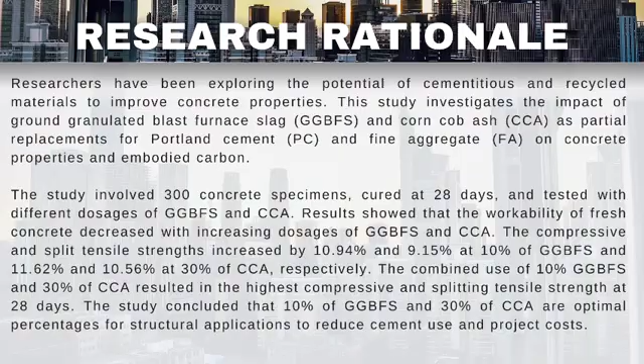Research significance: consistently developed towards sustainable growth in the construction industry. Second, reducing societal waste through the utilization of corn cobs. Lastly, to investigate the impact of GGBFS and CCA as partial replacement materials for PC and FA respectively on the properties of fresh and hardened concrete, as well as on the embodied carbon of concrete.

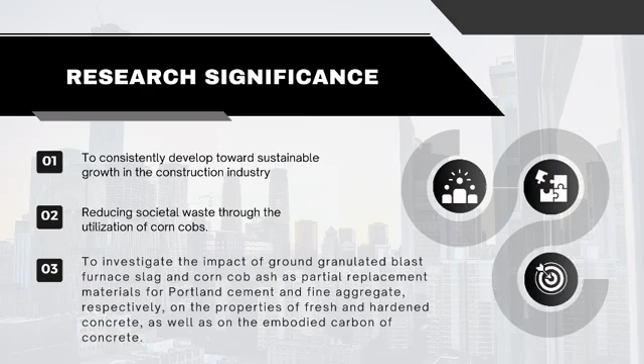Materials and methods: GGBFS, corn cob ash, coarse aggregate, and fine aggregates. The ground granulated blast furnace slag was obtained from a steel mill with prior approval. After collecting it, GGBFS was dried under atmospheric conditions for 24 hours. The dried GGBFS was passed through the number 300 sieve to eliminate unwanted particles, and then used as a PC replacement ingredient in the mixture.

The corn cob was collected and then burned under an uncontrolled temperature arrangement for 5 hours to convert it into corn cob ash. After obtaining the ash, it was sieved through the number 4 sieve to remove large particles, and then the sieved ash was utilized as a replacement for sand components in the mixture.

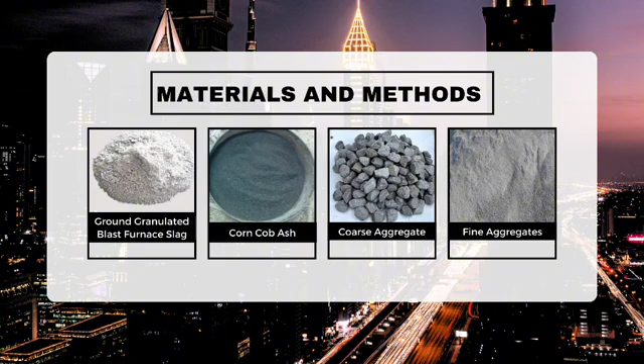The PC was collected and applied to the concrete mixtures as a binding ingredient. The oxide composition of PC, GGBFS, and CCA will be shown later. Furthermore, crushed stone was utilized in this research as coarse aggregate with a size of 20 mm, and hill sand was utilized as fine aggregate, which passed through the number 4 sieve. The physical properties will also be shown later. In addition, potable water was utilized to carry out the experimental work.

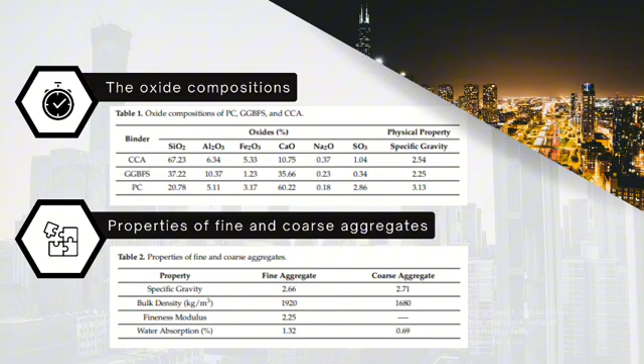The oxide composition for CCA, GGBFS, and PC. Next is the properties of fine aggregates and coarse aggregates, containing silicon dioxide, aluminum oxide, ferric oxide, calcium oxide, sodium oxide, and sulfur trioxide. And lastly, these are the designs of the mixtures.

Research results and discussions. Here are the mechanical properties of concrete. First, we have the slump test. Second, the water absorption. Third, dry density. And fourth, also the dry density.

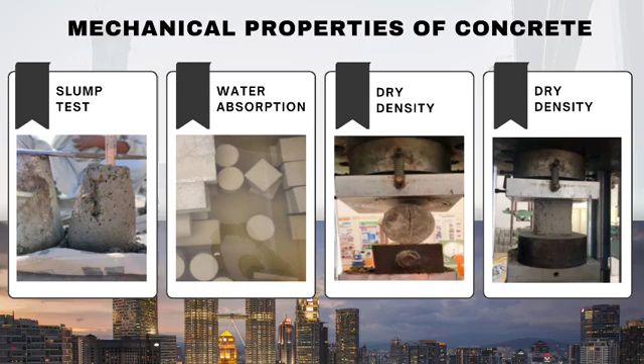The slump test illustrates the workability of the fresh mixture incorporating various percentages of GGBFS as a PC replacement and CCA as an FA replacement. The slump levels are 12.50%, 26.78%, 35.71%, and 51.78%, with GGBFS levels of 5%, 10%, 15%, and 20% respectively.

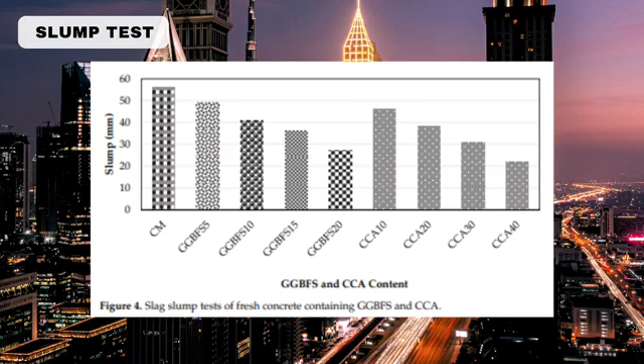Slump declines with the growth in the quantity of GGBFS by weight of PC, and FA replacement with CCA. It was found that workability of concrete declines with the replacement of PC with GGBFS, and metakaolin was increased in the mixture. It is also documented that the use of fine aggregate partially replaced with WSA reduced the workability of concrete.

As a PC and FA replacement in concrete, it can be perceived that the slump drops with the accumulation of GGBFS by weight of PC and CCA as a sand replacement together in the mixture. The decline in workability is associated with the porous GGBFS and CCA particles, which absorb more water as the percentages increase in the concrete mixture.

Where the slump declines as RHA replaces PC and WSA replaces sand, it was found that the increased replacement of PC with RHA and sand with coal bottom ash resulted in lower workability of fresh concrete.

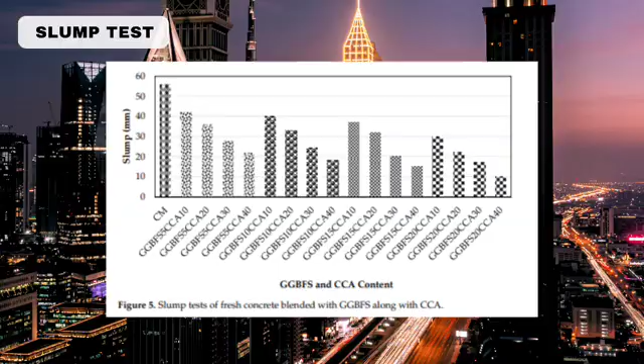Next is water absorption. The water absorption levels are 3.56%, 2.98%, 2.67%, and 2.38% when PC is replaced with GGBFS at levels of 5%, 10%, 15%, and 20% respectively, and 3.45%, 2.92%, 2.53%, and 2.15% when FA is replaced by CCA at levels of 10%, 20%, 30%, and 40% at 28 days, which are lower compared to a concrete mix prepared with PC only.

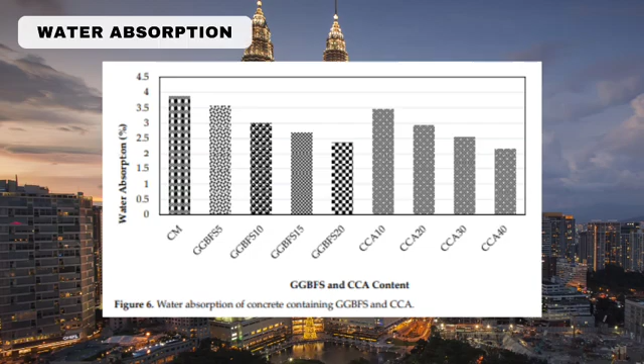The outcomes revealed that when the replacement of PC with GGBFS and sand with CCA increases in concrete, there is a reduction in the concrete's water absorption, where the increasing usage of MHA as a replacement of PC caused a decline in the water absorption of concrete.

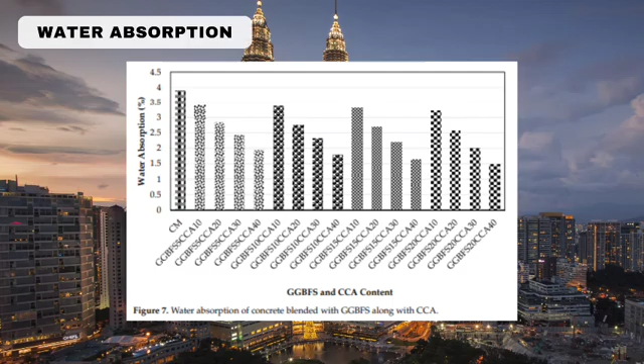The results of optimum water absorption are noted as being 3.88%, and the lowest value is calculated as being 1.48% using GGBFS 20% and CCA 40% as a replacement for PC. Fine aggregate replacement components in concrete are consistently lower compared to concrete made with PC only at 28 days. The outcome shows that water absorption of hardened concrete declines with the addition of GGBFS as a cementitious material along with CCA as a fine aggregate replacement. This drop in water absorption is due to the finest particles of GGBFS and CCA, which cover the remaining microporous material left by the other components of concrete.

Next is the density of concrete. The concrete density is 2,325 kg/m³, 2,250 kg/m³, 2,200 kg/m³, and 2,140 kg/m³ with GGBFS levels of 5%, 10%, 15%, and 20% respectively, and 2,296 kg/m³, 2,215 kg/m³, 2,110 kg/m³, and 2,085 kg/m³ with CCA levels of 10%, 20%, 30%, and 40% at 28 days, lower than that of concrete made of PC only.

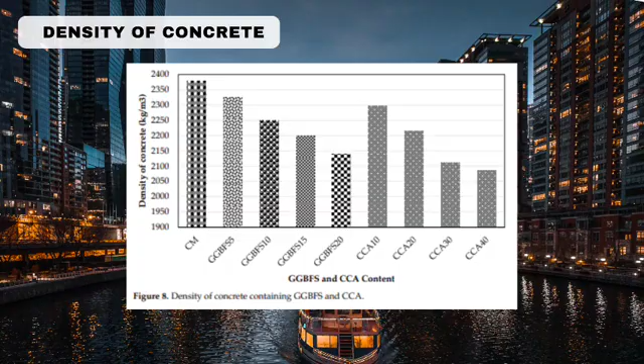This shows that the addition of GGBFS as a PC replacement and CCA as a fine aggregate replacement lowers the density of concrete, where increasing usage of GGBFS and MA as a PC replacement reduces the density of concrete. It was stated that the density of concrete lowers as the dosage of CBA as a sand replacement increases. Moreover, the density of concrete specimens blended with GGBFS as a cementitious material along with CCA in place of FA was determined. Also, the density of concrete is calculated as 2,378 kg/m³ in the concrete mixture made of PC only, and the lowest density is 1,935 kg/m³ with GGBFS 20% and CCA 40% as a PC and fine aggregate replacement at 28 days.

The outcome shows that enhancing the combined use of GGBFS by weight of PC and replacing FA with CCA in the mixture decreases the density of concrete. This change in density is associated with the density of the replacement materials GGBFS and CCA. These replacement materials possess lower specific gravity than PC and fine aggregate, which results in reduction in density as well as reduction in the dead load of concrete. It was found that concrete density is reduced as the replacement of PC with FF and FA with glass powder rises. It was concluded that the use of MHA as a PC replacement along with WSA as a sand replacement results in a decline in the density of concrete.

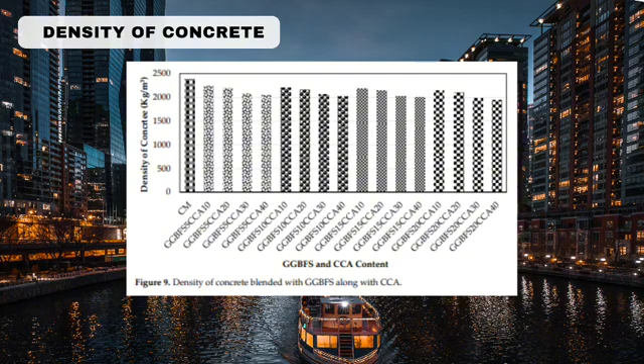Next is the compressive strength. The concrete mixture blended with GGBFS as a PC replacement and CCA as an FA replacement was analyzed for compressive strength at 28 days. The peak compressive strength is 29.40 MPa with 10% GGBFS as a PC replacement, and 29.58 MPa with 30% CCA as an FA replacement at 28 days. Similarly, the lowest compressive strength is 23.50 MPa with 20% GGBFS as a PC replacement, and 27.18 MPa with 40% fine aggregate replaced with CCA at 28 days.

The compressive strength is heightened with 10% GGBFS and 30% CCA. With further addition of GGBFS and CCA, the compressive strength declines. The pozzolanic response is such that freely available calcium hydroxide is consumed and secondary calcium silicate hydrate gel is produced, which is responsible for the increased strength when GGBFS content is added. The lower strength gain can be related to the limited supply availability of...

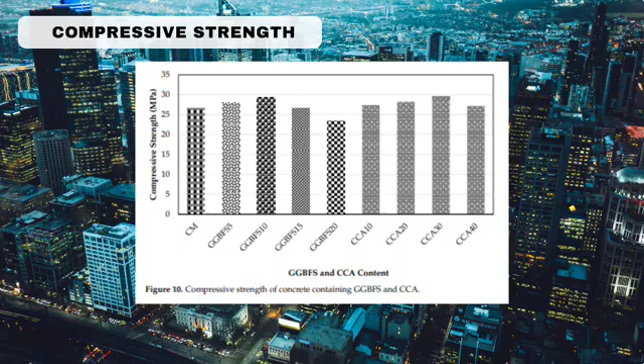Also, the compressive strength depicts the concrete with the accumulation of 5 to 20% GGBFS by weight of PC along with 10 to 40% of CCA as a sand replacement. To analyze the effect of PC and FA replacement on the compressive strength of concrete, the greatest value of compressive strength is 31 MPa with 10% GGBFS as the PC replacement along with 30% CCA as an FA replacement, and the lowest value is 21.18 MPa with 20% GGBFS and 40% CCA together in the concrete mixture at 28 days. The compressive strength is heightened at levels of GGBFS up to 10% and CCA up to 30% in the concrete mixture at 28 days.

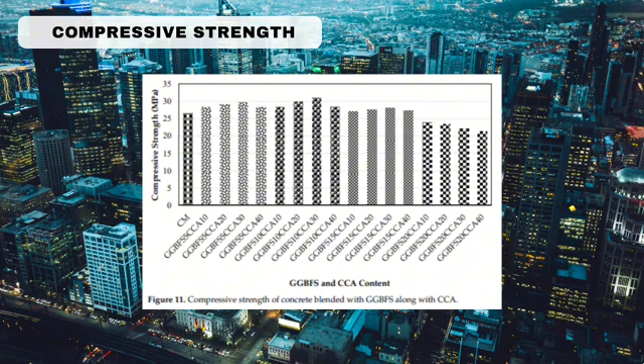Next is splitting tensile strength. This figure illustrates that the concrete mixture with 5 to 20% GGBFS by weight of PC was explored for splitting tensile strength of concrete. The optimum strength is achieved at 3.10 MPa with 10% GGBFS, and the minimum strength is 2.58 MPa with 20% GGBFS at 28 days. The maximum split tensile strength is obtained when using GGBFS as a PC replacement up to 10%. After further accumulation of GGBFS, the strength declines.

Similarly, the usage of CCA as a replacement for sand content in concrete is determined by its split tensile strength at 28 days. At 30% sand replacement with CCA, the supreme split tensile strength is measured at 3.14 MPa, and the smallest strength was measured as 2.86 MPa at 40% CCA at 28 days.

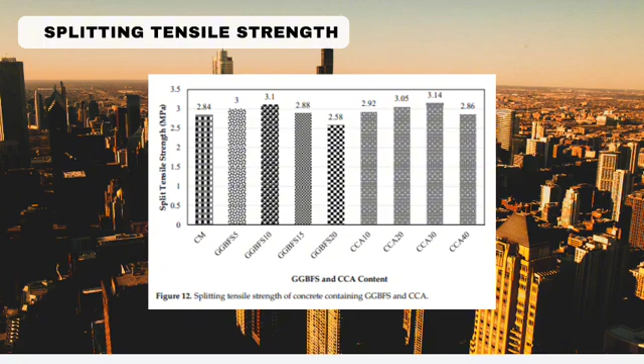As FA is replaced with CCA up to 10 to 30%, the indirect tensile strength increases. CCA is well known as a pozzolanic material, but it is utilized as a sand replacement in this research. Thus, it has a considerable supply of calcium hydroxide. As a result, the calcium hydroxide is consumed during the pozzolanic reaction caused by CCA.

Again, the splitting tensile strength of concrete was investigated with the addition of 5 to 20% GGBFS by the mass of PC and 10% to 40% of CCA by the weight of FA together in concrete. The best indirect tensile strength was observed at 3.22 MPa at 10% GGBFS along with 30% CCA, and the lowest value was documented at 2.40 MPa at 20% GGBFS along with 40% CCA together in concrete at 28 days.

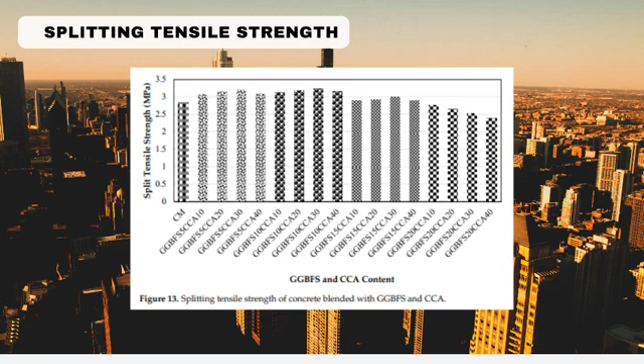The outcome is that the splitting tensile strength is boosted by the accumulation of GGBFS up to 10% as a replacement for PC and CCA up to 30% as a replacement for fine aggregate, and after further accumulation of CCA the strength plummets at 28 days. The increase in split tensile strength is associated with the CCA and GGBFS, which possess more specific surface area than the PC, and which developed the concrete interfacial transition zone.

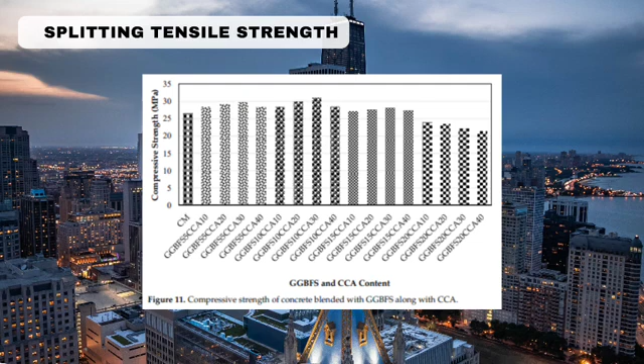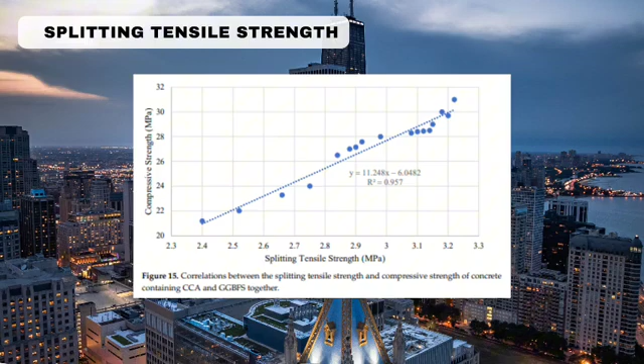In addition, a relationship has been established between the split tensile strength and compressive strength of concrete containing CCA and GGBFS, alone and together, at 28 days. Its split tensile and compressive strength had a strong correlation. When one of these strengths is known, the equation in this figure is useful for determining the split tensile strength or compressive strength.

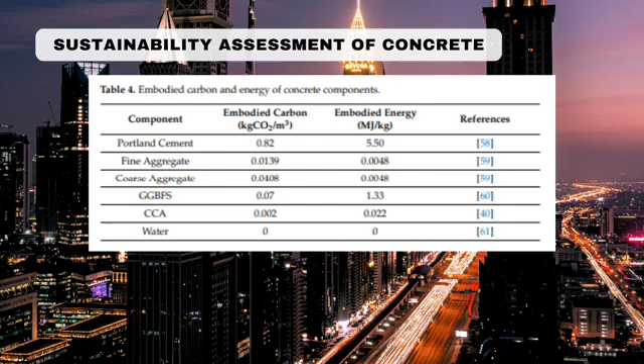Next is the sustainability assessment of concrete. They calculated environmental impact assessments for all mixtures blended with various replacements of PC with GGBFS, and fine aggregate with CCA, both individually and combined, to explore the embodied carbon dioxide, embodied energy, and eco-strength efficiency of the concrete mixtures. The values of embodied energy and carbon for all concrete constituents were obtained from the literature as displayed in Table 4.

Embodied carbon is recorded as 3.95%, 7.90%, 11.84%, and 15.76% lower while utilizing GGBFS levels of 5%, 10%, 15%, and 20% respectively, and 0.2%, 0.4%, 0.6%, and 0.8% lower with CCA levels of 10%, 20%, 30%, and 40% respectively, compared to concrete prepared with PC only. The sustainability assessment also shows that when the usage of GGBFS as a PC replacement along with CCA as an FA replacement increases in concrete, the embodied carbon decreases.

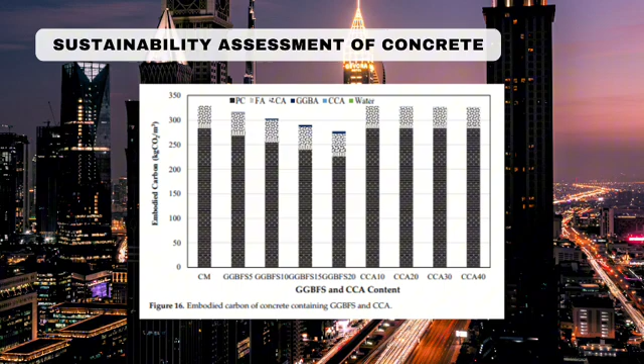Again, the sustainability assessment shows embodied energy is 3.78%, 7.56%, 11.34%, and 15.12% lower with GGBFS levels of 5%, 10%, 15%, and 20% respectively, compared to concrete made of PC only, and 0.05%, 0.10%, 0.15%, and 0.2% slightly higher with CCA levels of 10%, 20%, 30%, and 40% respectively, compared to concrete made of PC only.

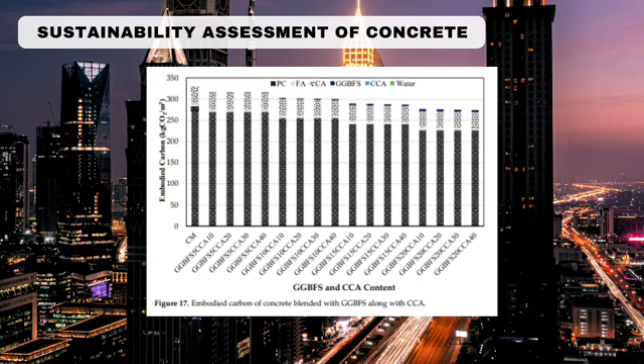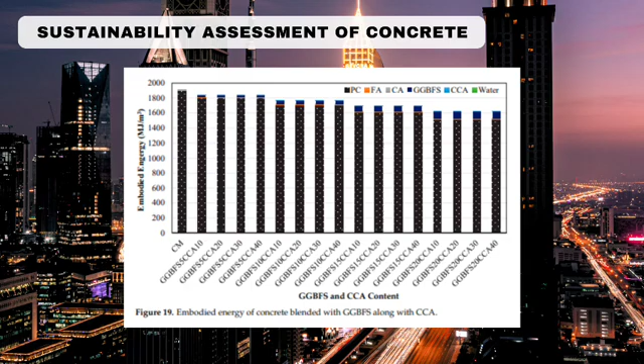Next is the eco-strength efficiency. The best eco-strength efficiency is 0.097 MPa with 10% GGBFS as a PC replacement, 0.0909 MPa with 30% CCA as an FA replacement, and 0.10 MPa with GGBFS 10% and CCA 30% replacing both PC and FA. The eco-strength efficiency has the lowest embodied carbon and maximum compressive strength among the various mixtures. Higher eco-strength efficiency was seen when GGBFS and CCA were used together.

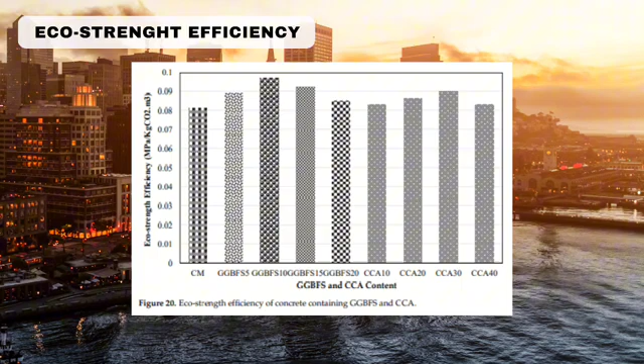This demonstrates that eco-strength efficiency varied due to the utilization of these materials, but overall eco-strength efficiency improved as the PC substitution level rose.

First, we introduced CCA for thermal insulation due to its high silica content and porous nature, and GGBFS for its capability to enhance overall matrix density, potentially improving thermal resistance.

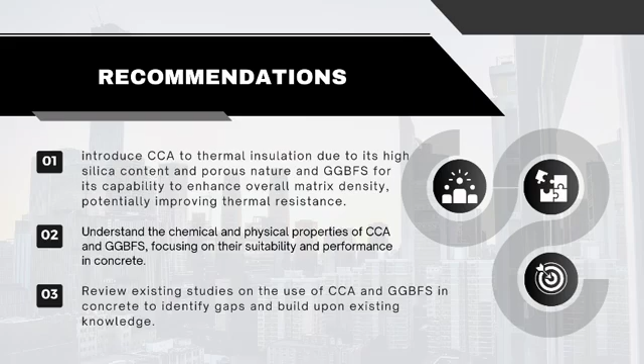Second, understand the chemical and physical properties of CCA and GGBFS, focusing on their suitability and performance in concrete. Third, review existing studies on the use of CCA and GGBFS in concrete to identify gaps and build upon existing knowledge. Fourth, implement field trials to validate laboratory results under real-world conditions.

Fifth, conduct an LCA to evaluate the environmental impact of using CCA and GGBFS in concrete. Lastly, we also need to include durability tests such as sulfate resistance and freeze-thaw cycles.